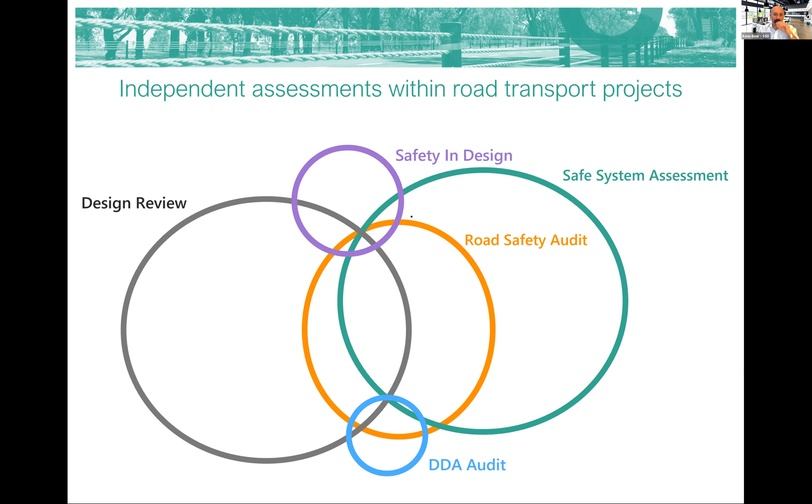I'll pause there to see if anybody has logistical questions. Kathy, did you want to add anything? No questions at the moment, and I think that's all covered very well, Ken. So let's get stuck into it.

I want to acknowledge the traditional owners of the many varied lands we're running this training on, and it does seem quite varied across Queensland. You're all Queenslanders, which helps with some specific content from my perspective. Kathy and I are based in Melbourne, but when allowed to, we love getting up to Queensland, getting out and immersing ourselves in your road network.

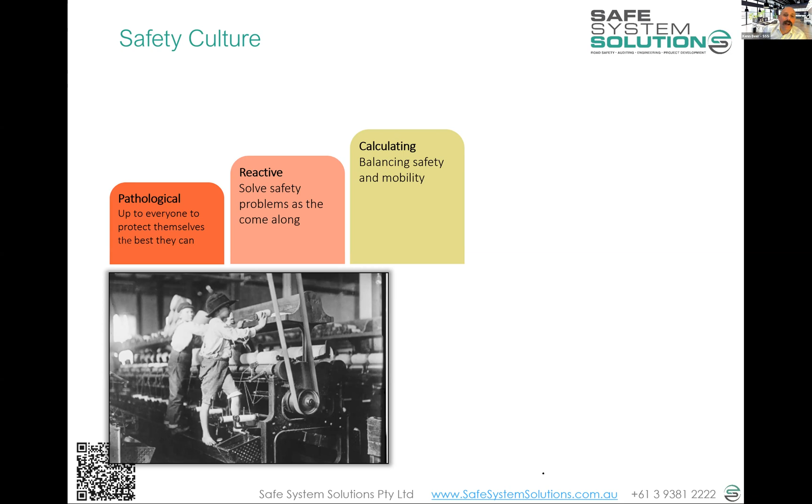And then we eventually evolve the system to a higher level of safety culture, and it's what we call a proactive safety culture, which basically says there is this very high benchmark for safety.

Tolerance of no death or serious injury, and we will produce widgets up to that. And if it can't be done with our assurance of safety, then we need to change the processes, or stop manufacturing widgets until we get that right, or completely alter things. We have to invest in stuff. The safety is paramount, and you work and produce widgets up to that safety level. Once you're up there, it's continual investment in maintenance of your safety interventions and your culture.

Now, I know you've already done the analogy of the road system into this as I've been talking, because you're all thinkers. And where do we sit with the Queensland Road Network and the management of it and the whole transport system? Where do we sit?

Well, let's think specifically about the road transport system. I'd say we sit definitely a bit in there, pathological. It's part of the legislation. We say you've got to be in control of the vehicle, it's dangerous, and safety is your responsibility as the individual driver, pedestrian, cyclist, or motorcyclist.

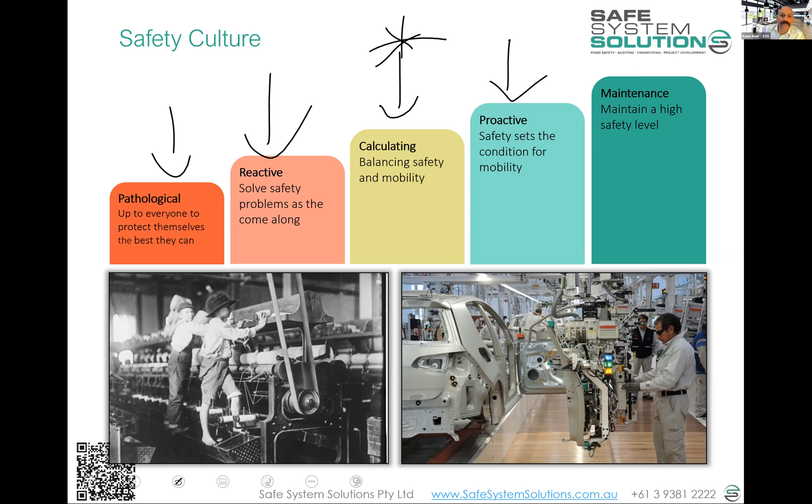Okay, before we jump into a quiz, Kathy, I want to see if there's any questions that have come up.

Thank you, Ken. Yeah, we've got a question about the Australian vehicle fleet having a relatively long turnover rate, something like 15 to 20 years, coupled with the target date for death and serious injury. How do you see some of these elements coming together, and how can we help?

It's a great question, and quite pertinent in understanding that this is a holistic system. We're going to talk a lot about the roads and roadsides because that's the area we play in, but the vehicles have an absolutely huge role. And Brad's right there in that we have quite an old fleet, somewhere around 12 to 14 years I think, and depending on your jurisdiction it can stretch out a little bit longer.

And there's a massive socioeconomic skew to that. We find some of the communities at highest risk are driving the oldest vehicles, and there's a whole lot of challenges with that. Governments often look into buyback schemes, into subsidy schemes for safer vehicles, and different things pop up here and there. We've got obviously car manufacturing challenges in Australia, so we're not investing then in different local areas. So it's quite a complex challenge.

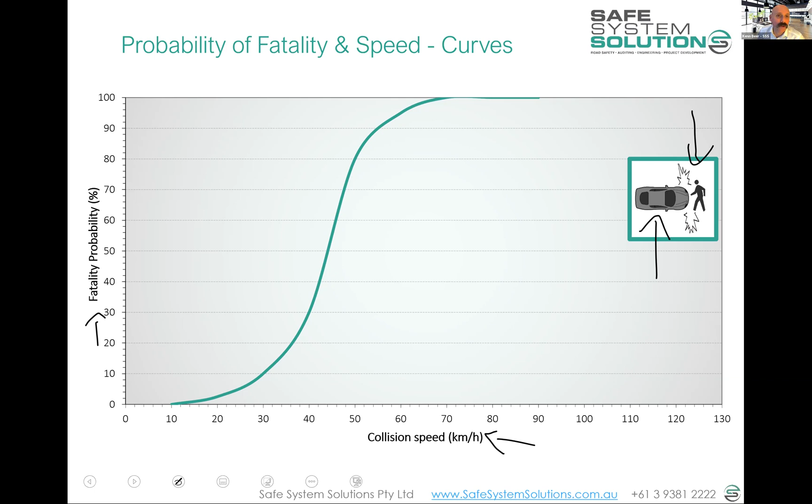And over here we have fatality probability. That's the chance that when a pedestrian in this case is struck by a passenger vehicle, a car, at these speeds, that's the chance it's going to result in death to a member of society. And it's across all members of society. Usain Bolt comes in a bit up the graph because he's a fair structure, isn't he? He's a hulk of a human. He's going to handle more force than

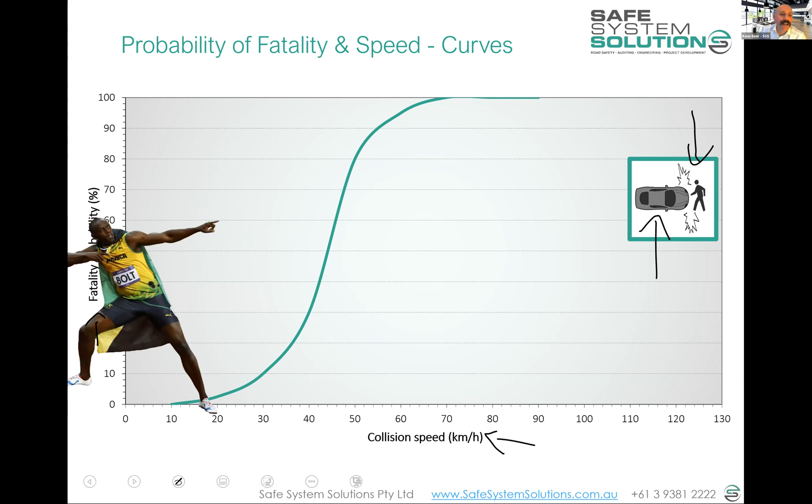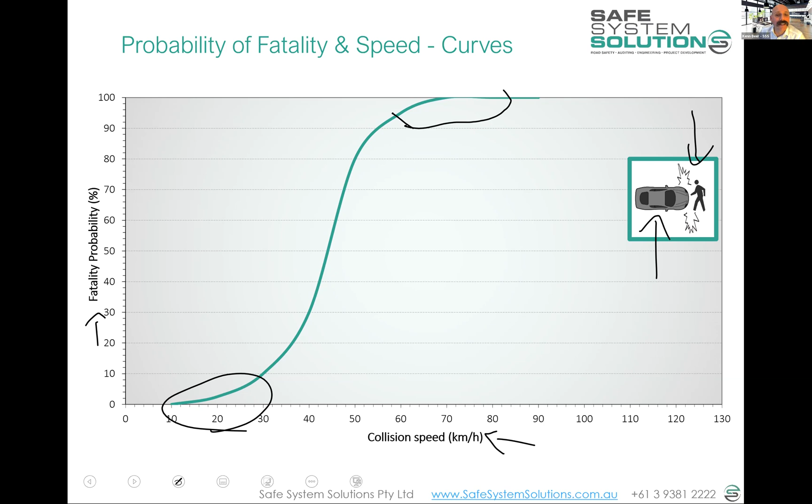old people, young people. And we see this general correlation. So down around 10, 20, 30 kilometers, people are highly likely to survive. Up high here, around 60, 70 kilometers an hour, they're highly likely to be killed in that incident. These are the kind of forces that humans are designed for, right?

We have this information and data for other crash types. This one is a right angle crash between passenger vehicles again. This one we call the bullet vehicle, right? The bullet vehicle is the one that does the striking, and this one's the target vehicle, right? The collision speed is the speed of the bullet vehicle. The fatality probability is for the target vehicle, whichever side's being struck, the driver's side or passenger side if there's a passenger.

So we know that around the 30, 40, 50 kilometer bullet vehicle speed, it's highly survivable. Up around 80, 90, 100, it's highly likely to result in death to the target vehicle.

We have this information for head-on crashes as well. But this is around 60, 70 kilometers an hour is fairly survivable. Up here around 90, 100, quite unsurvivable. In this case, both vehicles are bullet vehicles and both vehicles are target vehicles.

The speeds I'm talking about here in collision speed are not the closing speed on a head-on crash, okay? This is the individual vehicle speed. So take 70 kilometers per hour, for example. That's 70 for this vehicle, 70 for this vehicle. Closing speed would be 140. But the actual force on the occupant of the vehicle is a 70 kilometer per hour crash. It's the equivalent of a car running into a brick wall at 70 kilometers per hour.

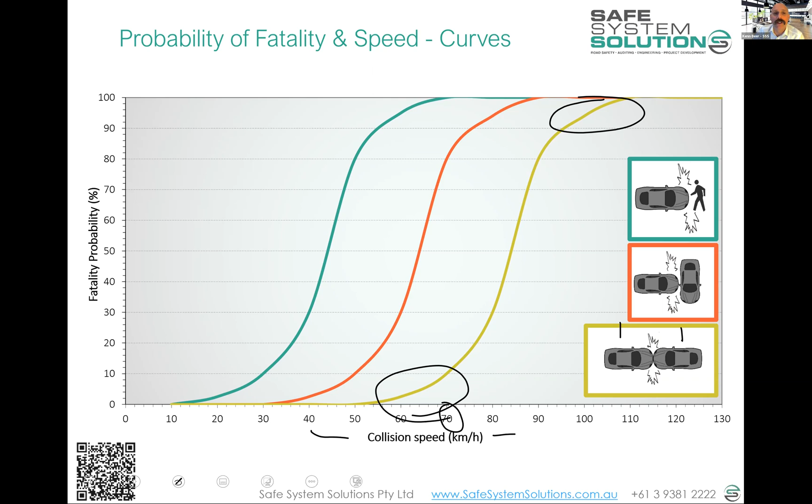And it's a real grey area, right? We know pedestrians struck by heavy vehicles around 70 kilometers an hour are going to be killed, just like that, the physics is absolute. But in some of these areas, there's always a chance of survival through different mechanisms, so it's a bit grey. You'll probably be coming back to this when you start doing assessments and trying to score severity of crash outcome when predicting crashes.

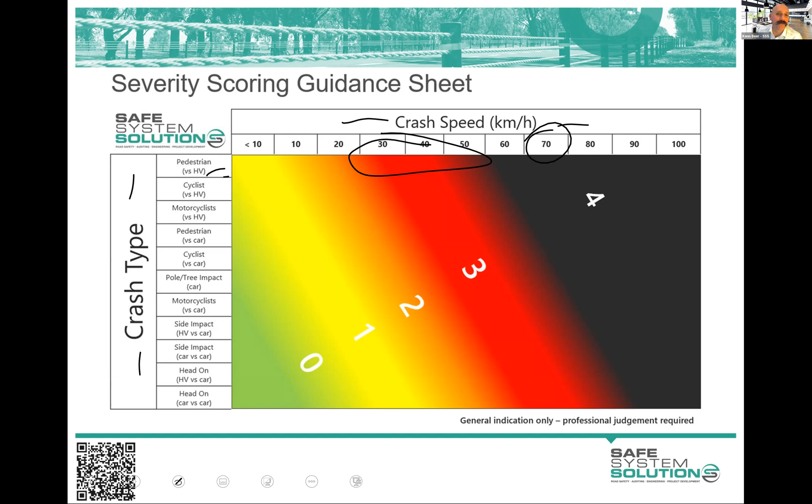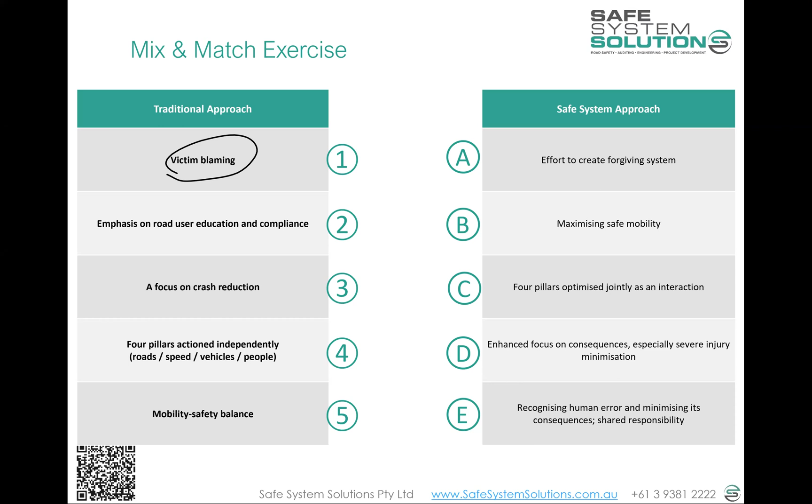And let's have a look here. Okay, looking pretty good. I'm going to stop sharing that and do it on the screen instead because it's easier to follow. I had a quick look, and most of you, I think, are thinking along the same lines. A couple of those ones I mentioned, which could go anywhere, were the ones a bit split by people. But victim blaming, we're really moving to recognizing human error and minimizing its consequences.

We're having that shared responsibility. There's been an emphasis on road user education and compliance—we're not ignoring that, but there's more now of an effort to create a forgiving system. Focus on crash reduction moves to an enhanced focus on consequence, especially severe injury minimization. So crash reduction implies all crashes and the like; we're really focused in on that high-end severity.

4 pillars actioned independently moves to 4 pillars optimized jointly as an interaction, understanding there's huge interaction between elements of our system. And mobility-safety balance—well, to maximize safe mobility is now where we want to go. I'll talk about that a bit more shortly, but it goes back to that widget production stuff I was talking about earlier. You maximize your mobility as long as it's safe.

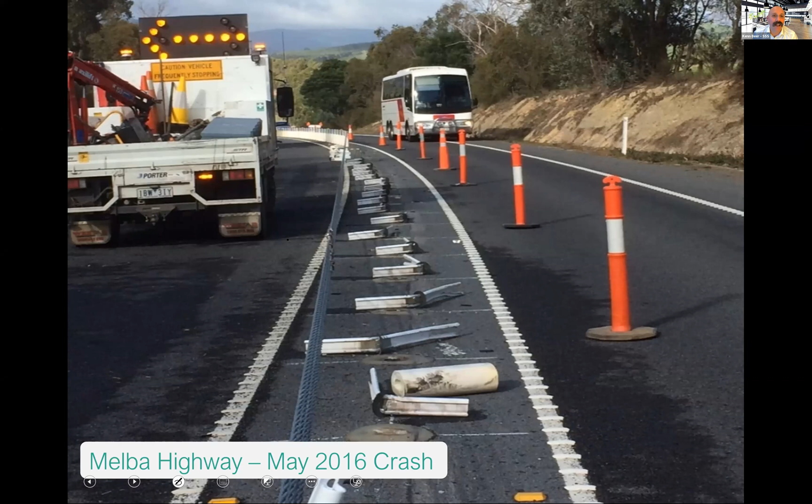And it gets hit. Interestingly, after it was in for a few months, it got hit once, and somebody called the road authority. I was involved in that incident. They said, I just want to talk to the people who put that barrier in the middle of the Melba Highway. They got onto the engineer responsible for the project, and when the public calls us, they go, here we go, they're going to have a shout at me about something.

But they just said, oh, listen, I just want to thank you for putting that barrier in. It saved my life. I was just driving along, and a car veered straight at me. They hit the barrier and slid along it, and I was there with my wife — if that barrier wasn't there, we would be dead for sure.

And to me, that's like a real safe system in action, because it's the system catering for the mistake that's been made. The engineer was crafty enough to go and tell the comms team about this, and they got those people to create a little video about this, and we've put it into your memory stick and into Moodle, and I want you to watch it.

It's like a 2-minute video, and it's just a wonderful video to show that these aren't bad people. They're not doing anything that normal people wouldn't do. One of them fell asleep, and if the barrier wasn't there, we would be blaming them. We would say, 'Don't drive when you're tired. Bloody hell, what are these people doing?' But the barrier just stepped in, didn't care why, just did its job, and we don't have death or serious injury.

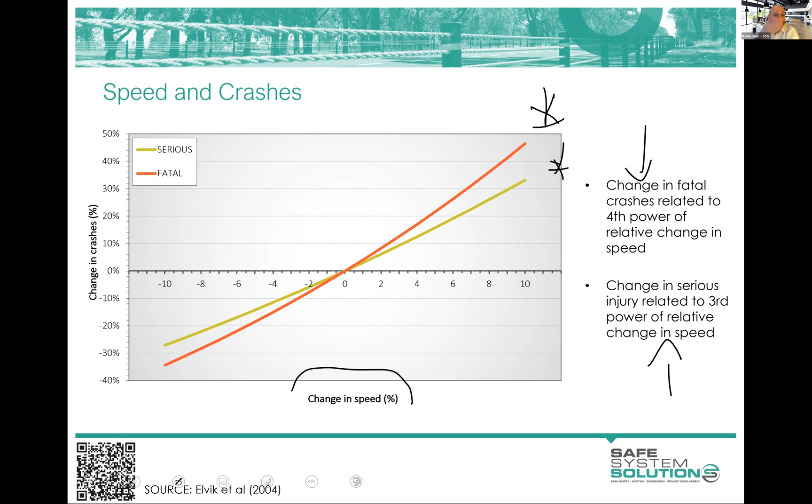It's a power relationship: a fourth power for fatalities and a third power for serious injuries. So small changes in speed can be massive when they play out through this chain.

The public really isn't convinced on this though, especially when it's talked about in speed limits. There's some interesting data from asking the public about their opinion on speed limits, safety, and crashes. I won't go through it in detail, apart from to say there's a bit more understanding among the public about the severity of crashes - they understand basic physics, and that's good, maybe we can play on that a bit. I really don't think... well, over half the population doesn't think speed limits actually change the crashes on the road. There is an absolute mountain of evidence to show that it does, but we need to convince the people.

And I'll remind you what your diagrams are saying. Crash forces are the result of the speed, the vehicle, what they hit, and the road user - which really depends on how frail they are in terms of what they can handle.

Question please, Ken. So why do we continue to design rural roads for 100+ kilometres an hour if we know that speed kills?